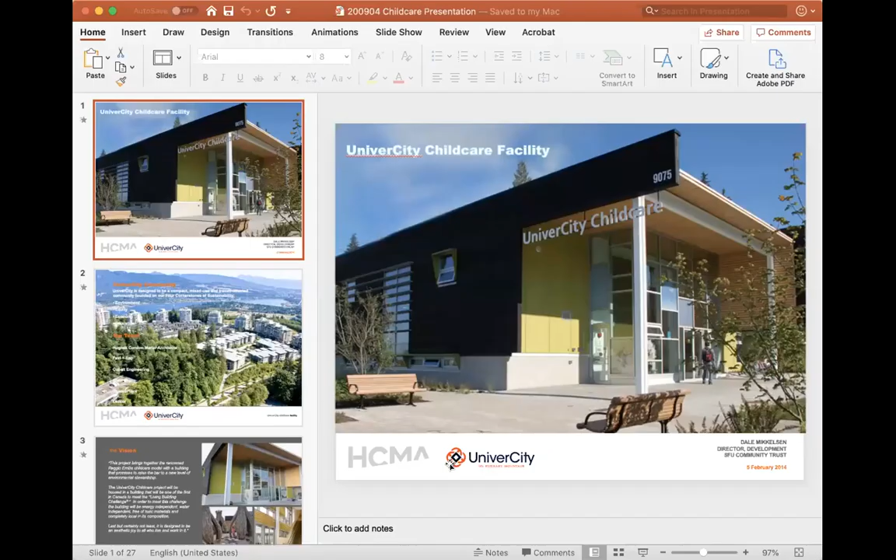All right, perfect. Well, thank you for this, and I'll just do a little time check here so I don't bring any of you over time. So previously I spoke about the community of UniverCity, which is what we call a model sustainable community, a greenfield development adjacent to Simon Fraser University in Burnaby, British Columbia.

Burnaby is a near suburb to Vancouver, BC proper. It's a university of about 27,000 full-time equivalent students, and the community itself, being developed on lands considered residual to the university's core academic needs, will ultimately be between 8,000 and 10,000 people upon full development. At this point, we've got about 6,500 residents living in the community, and it's a comprehensive community.

So when we say model sustainable community, we're not talking just about environmentally friendly buildings or environmental performance, but we're also talking about equitable communities. So we built and continue to build affordable housing for purchase and for rental. We have regular market developments done by market developers where we lease them land on 99-year prepaid leases, and they market and sell strata condo, strata townhouse homes to regular folks. We also talk about the economy. So one of our objectives, of course, is to make money.

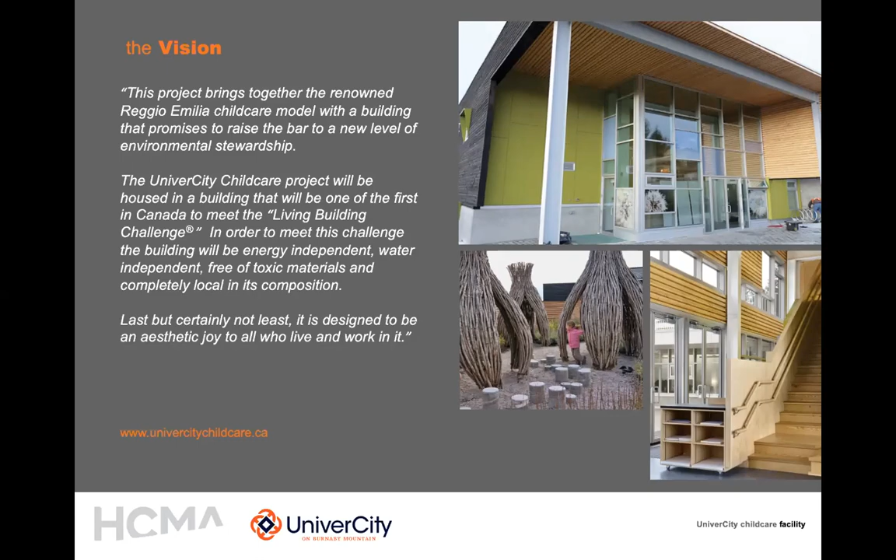And that has been a big success so far in terms of the facility—staff loving it, long-term retention of staff, and families supporting it.

Gold is still a high quality building, certainly, and a bar above a building code building. Then when you get into platinum, you're getting into what we would call your truly high performance buildings. And I would circle into that platinum category also Passive House, although Passive House disregards the efficacy and sustainability of the materials you're using.

At this point in time, Passive House really is an energy model, but as an energy model it's in that platinum plus level. Then there's living building, which the childcare is being designed to meet—net zero water, energy, no toxic materials. And the future beyond living building would be restorative design. Where LEED buildings seek to do better, living buildings seek to have zero impact, and restorative design buildings, in some way, shape, or form, produce more than they need—more energy than they need, treat more water than they need, for example.

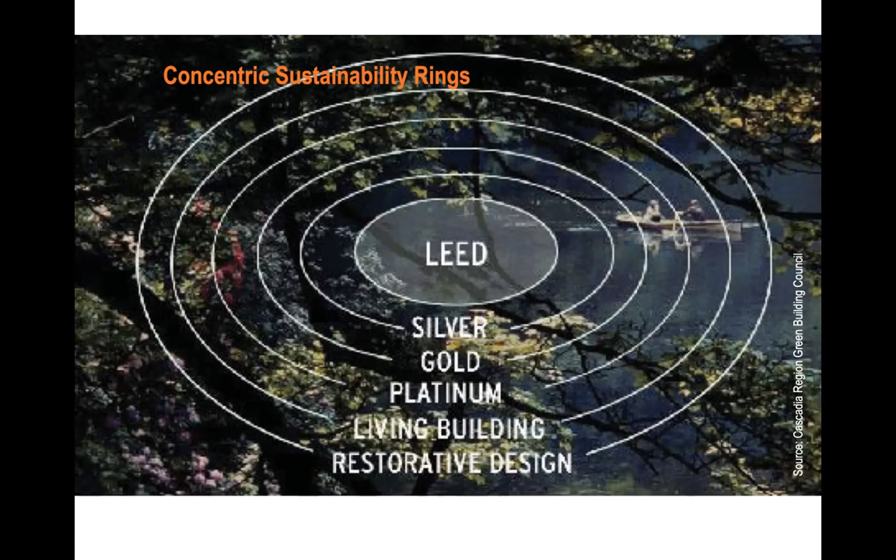Most of you probably know this, but the key to success in any sustainable building is an integrated design process. That process was done with team members throughout the educational community, academic, and development world that was going to be involved with this project.

This happened through a series of workshops. The first workshop really involved those people that would be running the childcare and what they need in a childcare facility. The second workshop then brought in the planning department, as well as the Fraser Health Authority and other consultants, noting that we would be really pushing the barriers in terms of building code, using a lot of performance code rather than prescriptive code.

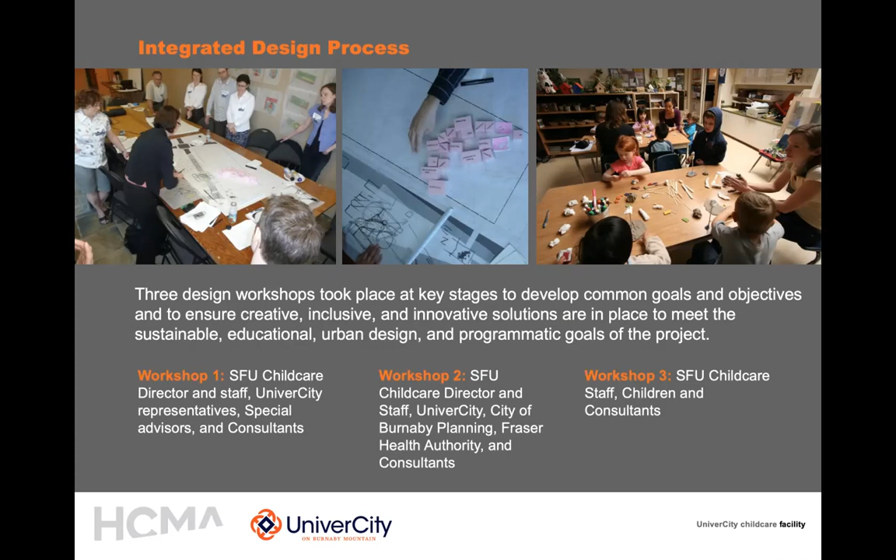And then finally, and most interestingly, was really bringing in the children that are in the existing childcare facilities at SFU to see what they really wanted to see in a childcare facility and what things were valuable to 3 to 5 year olds.

A real diverse mix. So we centered the university childcare one block off the high street, right next door to our fairly new University Highlands Elementary School, which is a public school.

This was in the early days, with a few pieces still not installed, and a lot of natural play equipment.

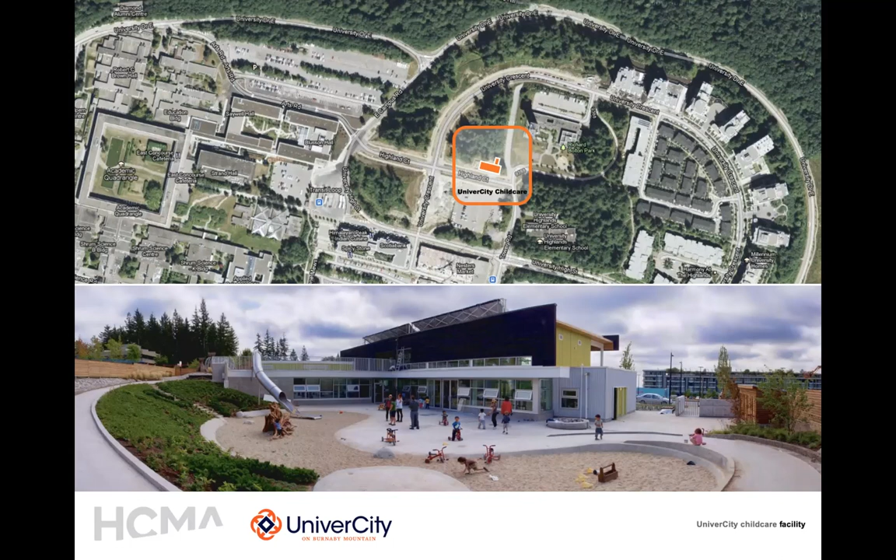This is what happens when you talk to the people who will be working, running and operating that building: having indoor washrooms only is a pain when 70% of the time children are playing outside. So very simple things add demands to the building. More washrooms equals more black water, which equals longer piping runs, et cetera, as well as provision of treated stormwater for art sinks, hand washing, and so on.

Site area is about 2,000 square meters, floor area about 530 square meters, or almost 6,000 square feet, and a very comprehensive outdoor play area of about 4,400 square feet.

Our construction costs for the project, including landscape, basically a full turnkey operation, fully furnished, operating, ready to go, was $3.2 million. That budget is a really interesting part of this story, in that we looked at 4 equivalent childcare facilities being developed in the region at the same time, of varying standards, anywhere from LEED certified to LEED platinum. We looked at construction costs for other similar wood frame structures, averaged that price, and said okay, this would be the price for a conventional building.

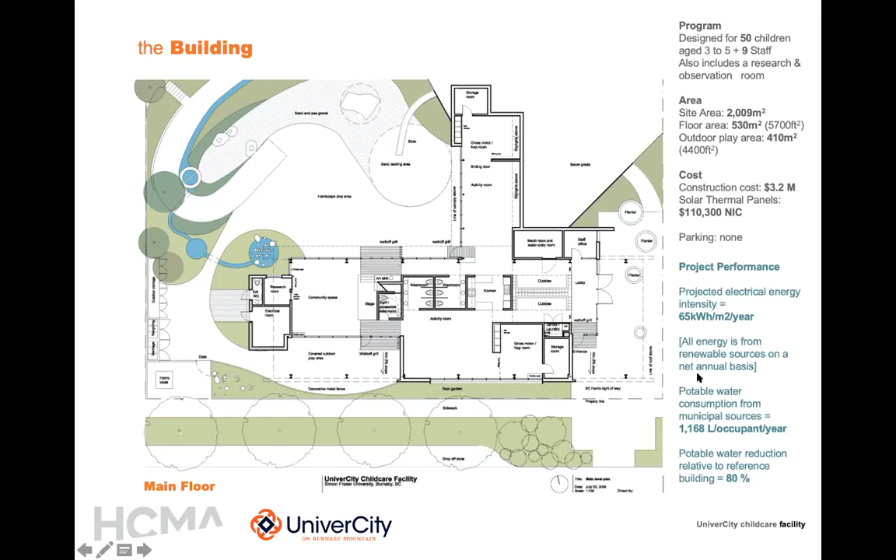We looked at our potable water consumption from municipal sources, and it's a surprising number, almost 1,200 liters per occupant per year. Compared to a reference building, we were looking to reduce that potable water need by 80%, which of course lowers the demand on the building systems as well.

Basically the categories of the living building challenge, like LEED, are site - are you selecting the site responsibly? This site was a previously disturbed site, used for storage and backfill and waste during the initial construction of the campus. Limits to growth is really working within an already planned community with planned density.

Habitat exchange is interesting in that you're looking to offset your site footprint with preserved habitat elsewhere, and that can involve very large scale jumping - you can go way outside of your region. We could have bought a hunk of land in the Yukon of the same size and dedicated that for permanent habitat exchange. I have some emotional challenges with this, but at the end of the day, up at UniverCity, we had set aside a considerable amount of land, comparable to the entire community, in permanent conservation area and green space through the development of UniverCity, which qualified to meet the habitat exchange.

So our conservation area on the mountain also worked for our habitat exchange. Again, this is that scale jumping for things that you can't do on site. You can maximize opportunities within your local neighborhood if you're already doing sustainable things.

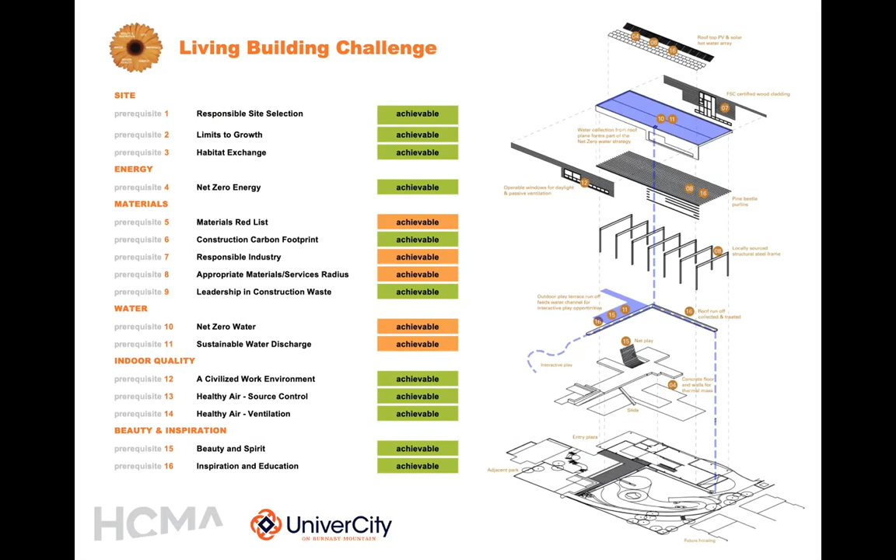Indoor air quality, again, this is really out of the LEED books, fairly manageable in terms of 100% fresh air, good quality source control. And then beauty and inspiration—I mean, it's a childcare facility, it's for kids. Bit of a no-brainer for this one. You're building a space for children. It should be wonderful. So I'll dive a little deeper into some of this here.

So the first one's energy. 100% of the building's energy needs supplied by on-site renewable energy on a net annual basis. And I'll speak a little bit about the district energy utility and my challenges with the living building challenge here.

So we looked at the total energy load in the building. Heating, of course, in North America or in Canada is the primary load, followed by lighting. Surprisingly, the black water treatment takes quite a bit of energy, and then other minor items. But really we're dealing with heating, lighting, and the black water treatment facility, and the black water is mostly all of that pumping energy and treatment energy.

So the living building challenge hates combustion. Our neighborhood energy utility within the SFU campus and within the university neighborhood is a bioenergy facility that is combusting waste material. This is primarily wood and organic waste, largely from construction, that is dirty, uncleanable, untreated, and otherwise would be directed to landfill. So rather than directing these materials to landfill, they're directed to our neighborhood energy utility, which combusts this material at close to 92% efficiency with good quality air scrubbing and condensing systems, creating very little local and larger emissions.

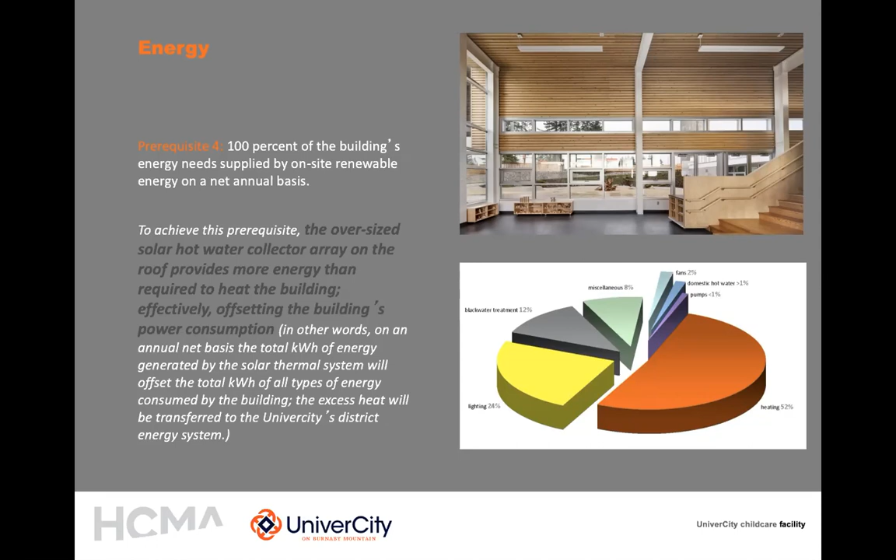So we have yet to achieve the certification of a net zero energy building. We're about 20% shy of that because, in terms of the math of the solar thermal energy and the metered volume we're producing, our neighborhood energy system, at the temperature it operates at, cannot take it all in at the peak periods it's being produced. So we're basically blowing it off - a bit unfortunate that way.

Had the Living Building program allowed combustion, we really probably would not have even needed these solar thermal cells, except to maybe offset the missing 8 to 10% efficiency that the system itself is not providing.

So anyways, here you get a look at how that solar energy system works that I just described. We have the evacuated tube solar collectors on the roof, which basically run through a heat exchanger, working with a mechanical room. Some of that is captured for the in-floor heating, but the majority of it is brought into the Corix bioenergy system.

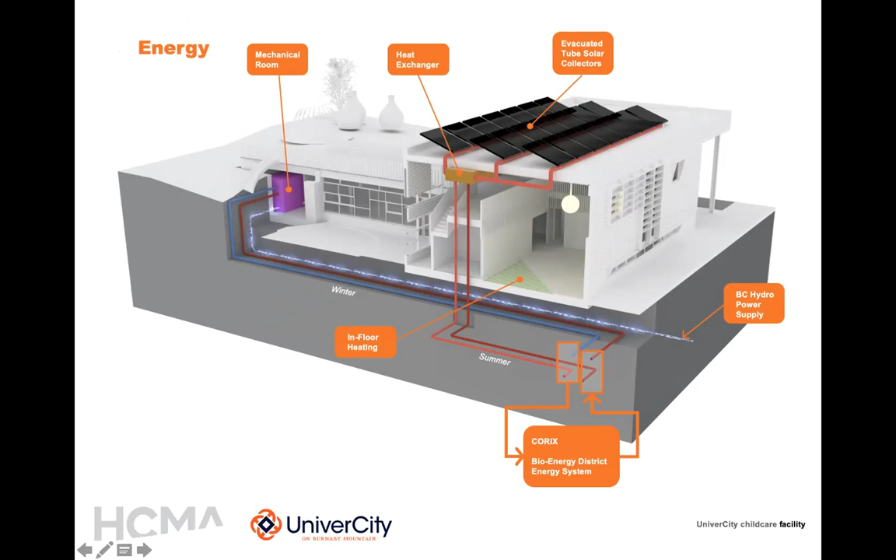And then again, we overproduce to offset our BC Hydro power supply, which electrical energy is really only used in this case for lighting and plug load, which is minor in this building.

So the next item is water. According to the Living Building Challenge, 100% of the occupants' water must come from captured precipitation or closed loop water systems. So as we all know, this is really, really challenging.

The Fraser Health Authority and the City of Burnaby regulations require the treatment of drinking water with chlorine. Therefore, the project's drinking water is supplied through a municipal source. That's an acceptable deviation from the Living Building Challenge, with a letter from the Fraser Health Authority and the City of Burnaby saying they would not accept on-site treated water that is only treated through UV filtration.

So we do use municipal water for all drinking taps. Rainwater is collected and treated before use for flushing toilets. It's actually also now used for janitorial sinks, and it's used for all of the laundry systems, and it's used for the commercial dishwasher because that essentially boils water prior to cleaning the dishes. And the project has no site irrigation.

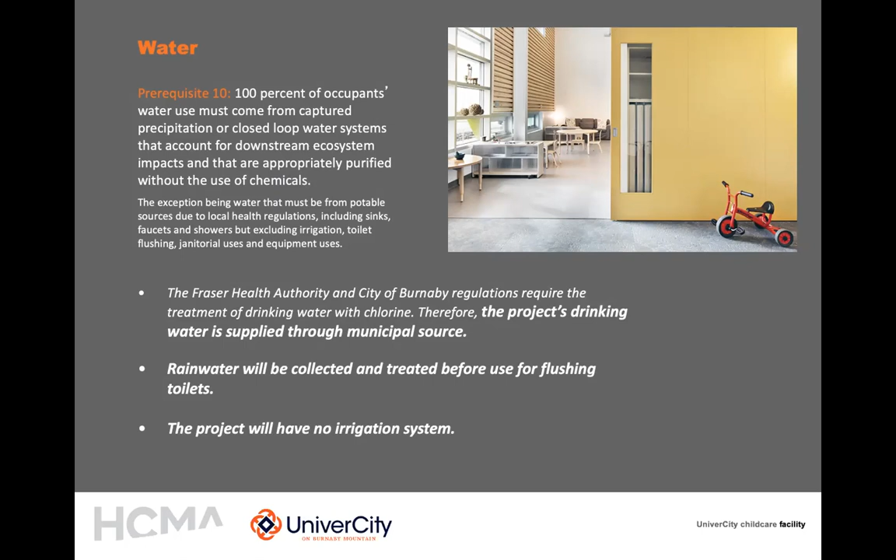So this is where we go back to scale jumping - this is the stormwater question. Certainly in British Columbia and the Lower Mainland, we get a lot of stormwater. So stormwater and building water discharge has to be managed on site and integrated into the building.

So we produce or capture more stormwater on this site than we would ever be able to use on an annual basis, particularly during the wet seasons. In addition, the size of the cistern or storage facility would have to be massively large.

So fortunately, at UniverCity, right from the outset, we'd worked with the City of Burnaby to have neighborhood stormwater management. As I spoke to in my last presentation, 100% of the community stormwater is not put into a conventional storm system, but is rather managed through swales, infiltration galleries, and ultimately ponds, and then dispersed to the Stoney Creek watershed. So we were able to tie all of our residual and excess water out of the cistern into the community system, knowing that it was being treated 100% naturally. It really was a low cost solution for us that was already managed at the neighborhood scale.

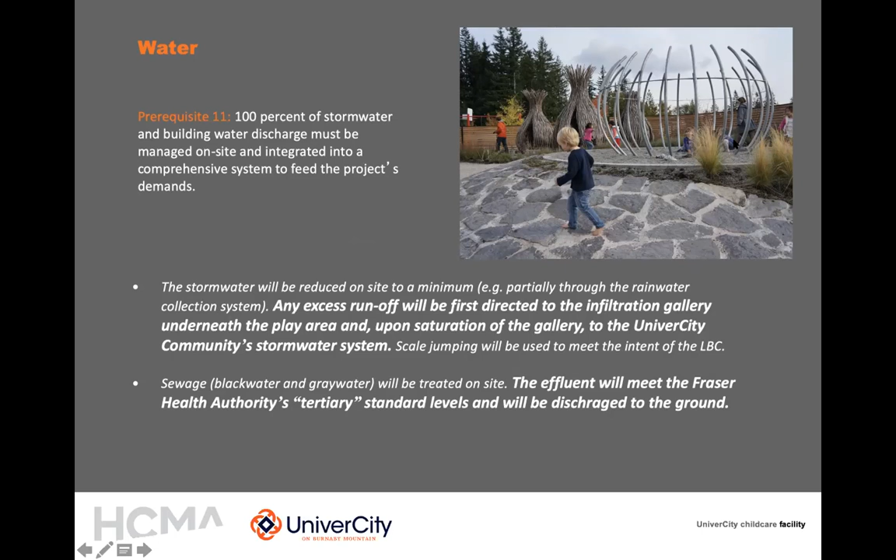The sewage, black water, and gray water was treated on site, and I'll speak to that system in a second. So really here's the water cycle scheme.

The municipal water, as was required by code, was used for really the sink and the drinking fountains. And then, as I noted, we've since been able to migrate the dishwasher, because it's a commercial dishwasher, and the laundry into the rainwater system. So the rainwater in the storage tank, because we had residual water, is now being used for toilet flushing, all the janitorial needs, the laundry, and the dishwasher.

Irrigation is a bit of a misnomer. We don't really use it for irrigation. What we do is reject some of the residual into the underlying soil, which acts as a sort of passive irrigation. We have no water features in the building.

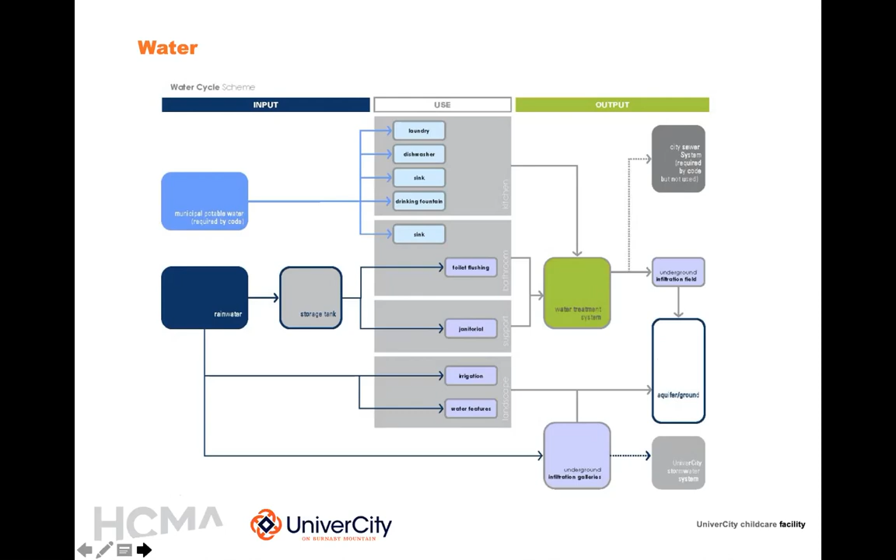Anything used in the building goes through our water treatment system, which is backed up to the city sewer as required by code. We have yet to have to utilize or back up to the city system, and it goes into either our UniverCity communal rainwater stormwater facility or into our black water treatment system.

So here's a blown up drawing of really how that works, and it's just that flow diagram put into 3D for you, so fairly straightforward.

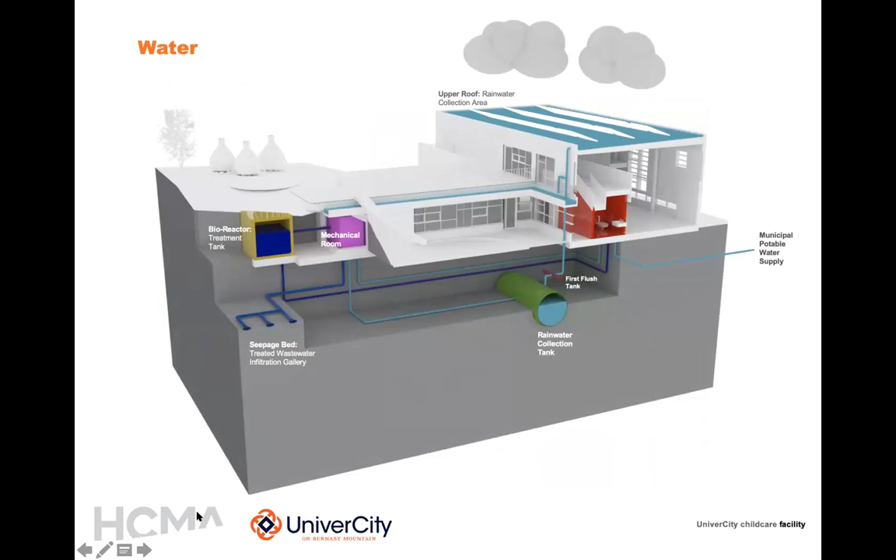It goes through an anaerobic digestion process, then it's further filtered through a carbonized area, and then finally it goes into an aerobic zone that allows the growth of bacteria that further treats the water.

All of the liquid portion, which is about 80 to 85% of the effluent, is rejected to ground within the childcare site below 1.5 meters in depth.

We put in a couple of wells just to make sure there wasn't any fecal coliform or any other buildup of contaminants. And 5 years in, we're showing nothing that would be contaminated. So that water coming out is essentially equivalent to rainwater in terms of its quality, and that's how it's considered by Fraser Health.

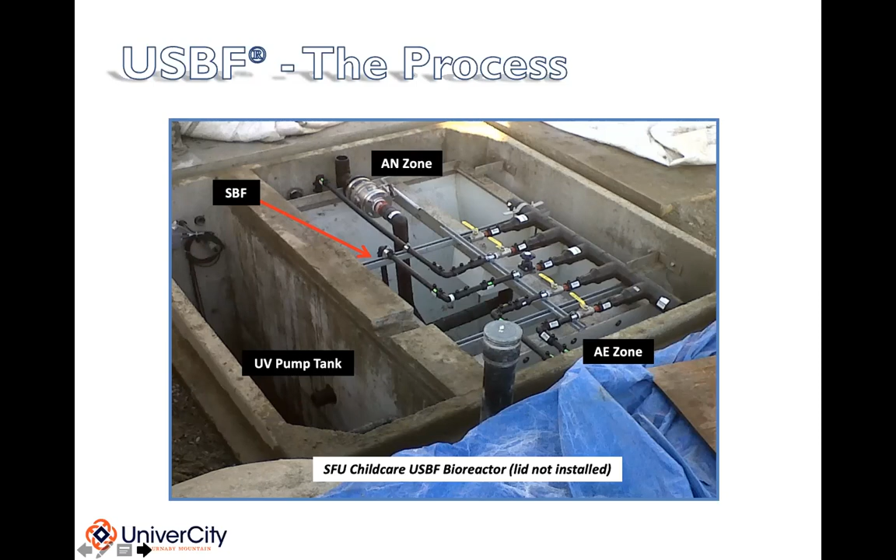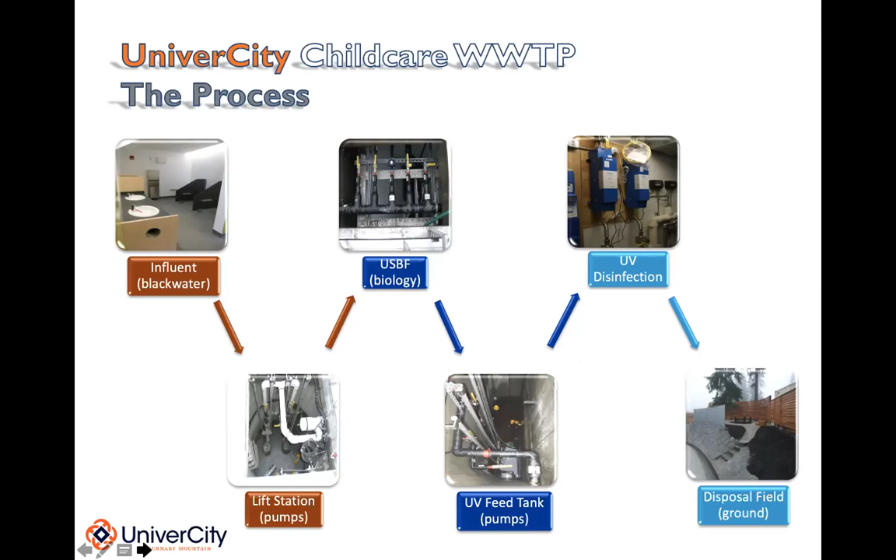So there you go, the influent, the black water comes in, goes through the pumps, the lift stations, through the biology system, back through the UV tank for UV disinfection of the liquid, and then out to the disposal field. So graphically fairly simple. The technology has proven to be fairly robust for us, knock on wood, 4+ years in. It's actually been, to me, one of the biggest successes because of how easy it is to operate.

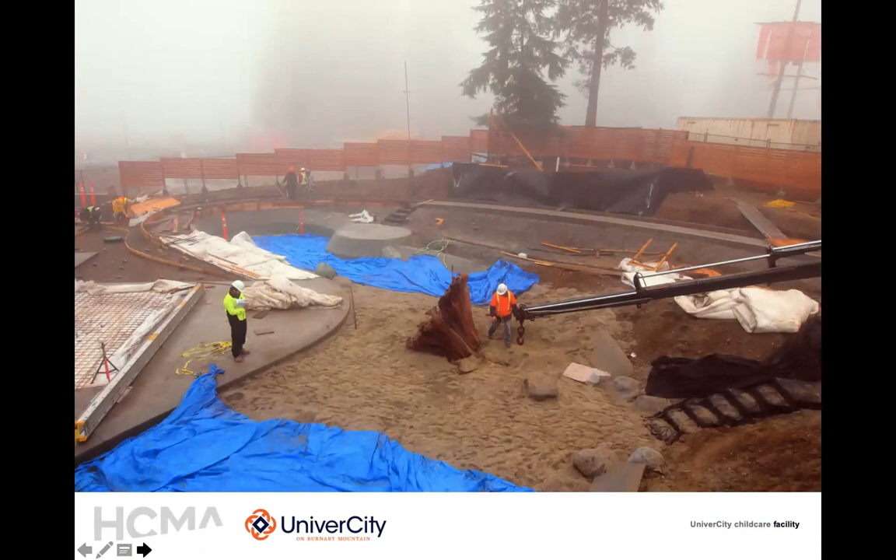Just a photo of construction of basically a landscaped, highly infiltrative play area for the children using natural features like cedar stumps as play features. But really what we're showing here is the area below that sand bed is our entire site infiltration gallery. So doubling up on the uses, you need large layers of sand and soft surfacing for children's play. You also need that for absorption and infiltration. So things can work together very well.

This is a look at the play features in the facility. This was an interesting and fun part of the project. The Living Building Challenge doesn't necessarily require you to meet their requirements in terms of the external space of the building. We did choose to build all of our play structures meeting the Living Building Challenge.

Using native materials found within the community or within the appropriate materials radius for the Living Building Challenge, we have a variety of interactive features like stepping stones, using recycled steel rods to create what we call the ropes nest, which allows children to use rope salvaged from the local sailing industry to create all kinds of structures and features. It allows the play facilities to continue to change and evolve over time rather than a static piece of plastic play equipment.

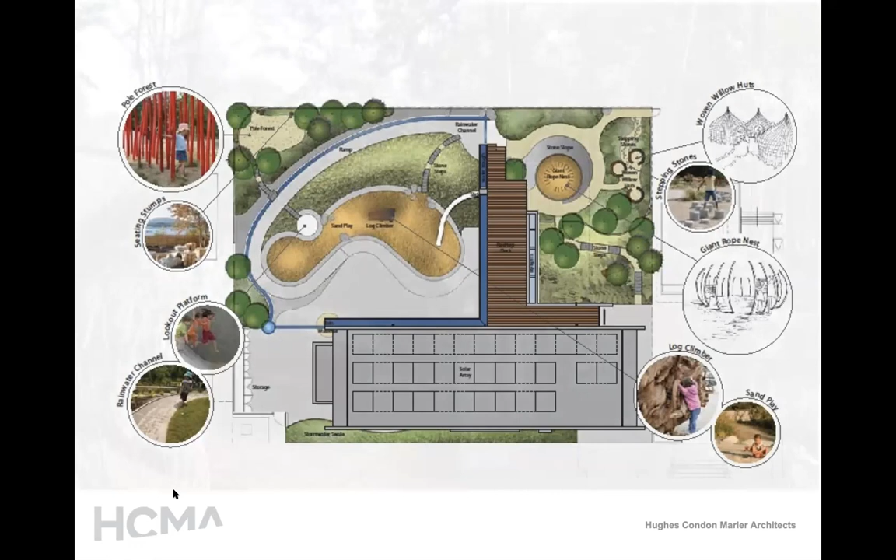We worked with a local artist to salvage willow and rebar and create these woven willow huts that continue to change with seasonality and time as well. So it's been a really fun and interesting part of the facility. These are the woven huts. Alistair's sample, done on his own compound on Hornby Island, is to the right, and to the left, using those kinds of ideas to create the structures.

This was perhaps one of the biggest things learned from Ledcor, the contractor. They were very familiar with LEED, not at all familiar with the Living Building Challenge. As with LEED, they realized early on that to be successful they would need a system that was teachable and repeatable, so it couldn't be new every time a new trade or contractor came on board. They needed replicable, repeatable systems, so they developed a spreadsheet system and a classroom system reviewed semi-weekly to ensure everybody kept being reminded and put into this simplified system of tracking what they were doing and how.

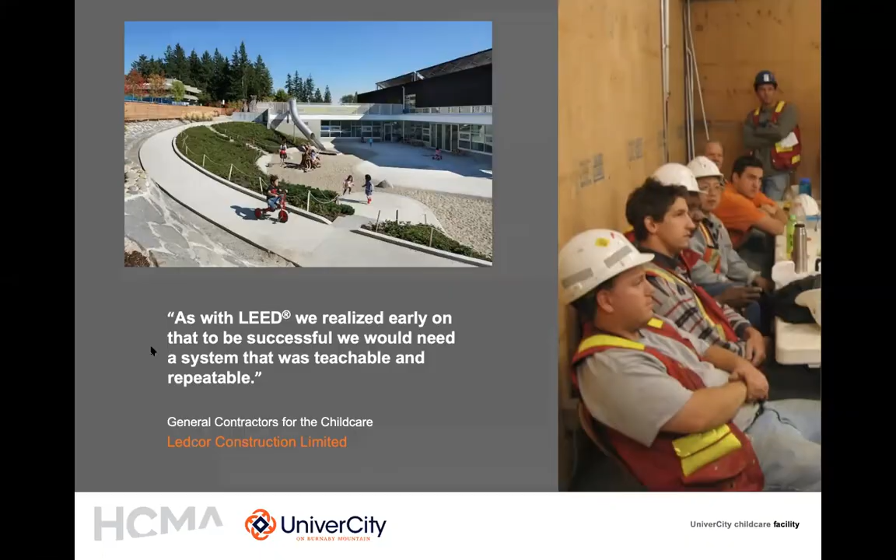So this is the question I was talking about. Materials was a real challenge for our contractors and suppliers. Given where we're located, the Living Building Challenge requires about 80% of your materials to come from that inner ring. When you're on the west coast of Canada and your next nearest urban center is Seattle, you're really limited in manufacturing options.

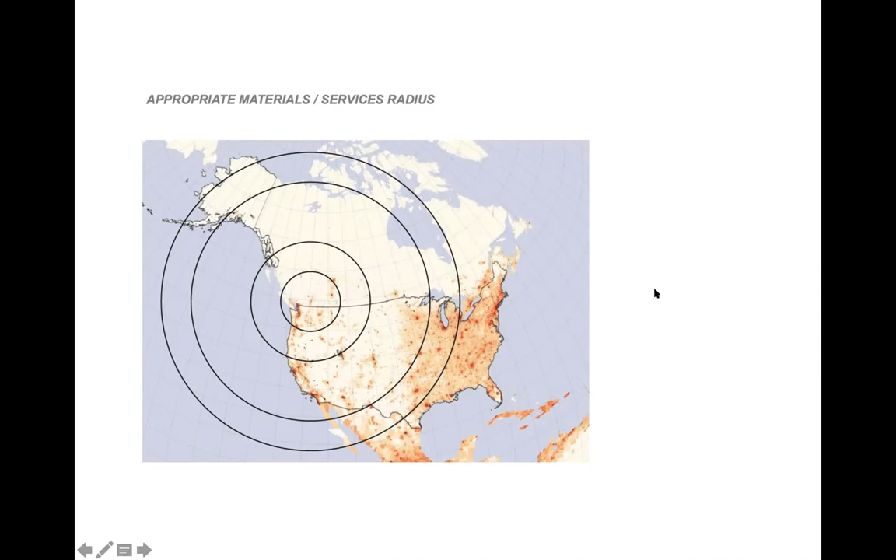This heat map is designed around the materials manufacturing sectors in North America, showing building materials and where they're manufactured. You notice a huge amount of yellow in our radius, so establishing those material flows was really challenging. If you're in Toronto, New York City, or even Miami, Florida, despite water, you have a lot more opportunity for materials availability. So our list got really small, really fast.

So what our team did is develop a very small palette of materials and said, let's simplify this building, let's minimize the number of materials. Our building is made out of really six core building materials: steel, Hardie board, dimensional lumber, drywall, and flooring material. It's a very simple building to review against this criteria. Then we worked on the architecture to make it more exciting through color rather than articulation and change of materials and claddings, et cetera.

So what we learned is that the materials red list was very, very difficult. At the end of the day we did achieve it, and that service radius didn't help at all. In the end we managed to be awarded the Living Building Challenge certification for all of these items, except for, as I noted, net zero energy. So it's been a fairly successful project, however there's been a lot of lessons learned.

At the end of the day, it's the right thing to do. Would I do another living building? Probably not. But we learned a lot through this process, and a lot of this applies to, for example, our Parcel 21 project, which we're working on next. We also learned that the LBC program is a work in progress. Even five years later I consider every LBC project still a pilot project. You have to do this because you really want to, and because you feel there's value in advancing the thought around green building or demonstrating to other more traditional developers what is possible within a fixed budget.

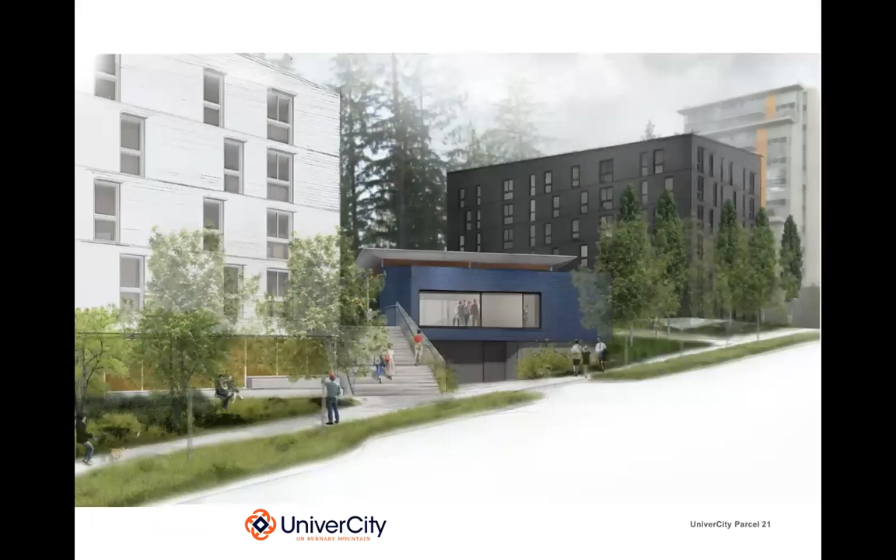And so that brings me to wrap up the last 15 minutes on our next project, which is what we call Parcel 21. So this is a 2-building, low-rise, wood frame, rental apartment building. You can see the renderings here.

We're now, the white building you see on the left, is now almost closed up with interior starting. And the east building, the black building you see behind, is 2 grade and is now starting its framing process. We're expecting occupancy in August of next year, so that the September intake of students will be able to occupy this building.

100% during that year. And then you'll note what we call the pavilion in the center, this small floor plate steel structure separate from the other building envelopes, will become a public facility for the community and for the campus. One of these things about large high density communities is they're always seeking community space.

Universities are seeking community space, graduate students are seeking gathering space where any kind of event can be programmed. So it's a simple open pavilion that will be a gathering space that brings community and the university together, and also protrudes upon the building setback line to really announce its forward-facing publicness. So a very interesting project.

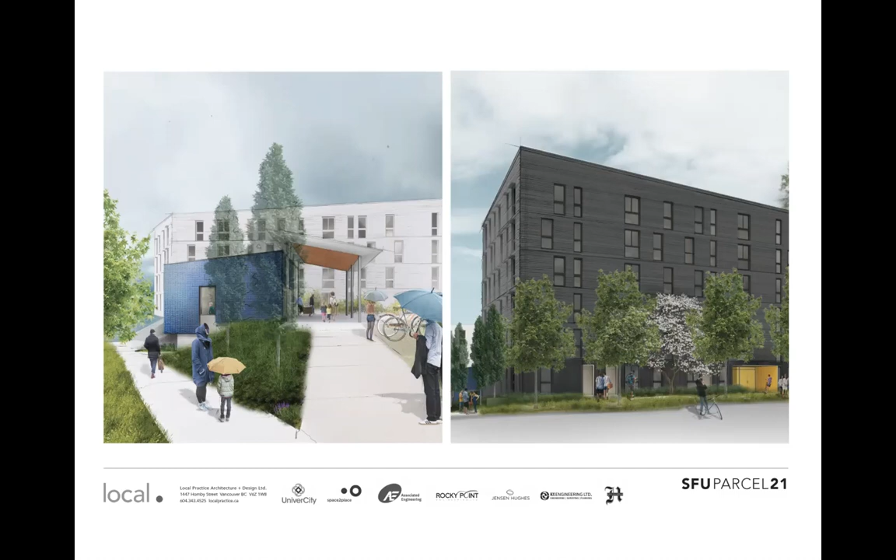The thing about Passive House buildings, of course, is you want to minimize articulation, you want to minimize window wall, and you want to increase your thermal envelope, which is really your insulation and your air tightness of the building.

We basically came up with this floor plate as the most efficient floor plate and model for Passive House construction. There's also a simplicity and an elegance in building these, so rather than spending a lot of money on articulations and architectural treatments, you can spend your money in the envelope and insulation of the building, and really focus on the human spaces rather than the building itself. So that was the objective here.

What we quickly realized through Passive House modeling is in multi-unit residential buildings, Passive House goes to the center of the earth, which means your parkade facility, your underground parking facility, also needs to meet Passive House certification. This has considerable implications on how much air tightness and insulation you need around the elevator core, and how much all of your below-grade footings are also insulated and mounted onto basically styrofoam plates, which is a code challenge and a code issue. So we looked at what it would take to make the below-grade space meet Passive House certification.

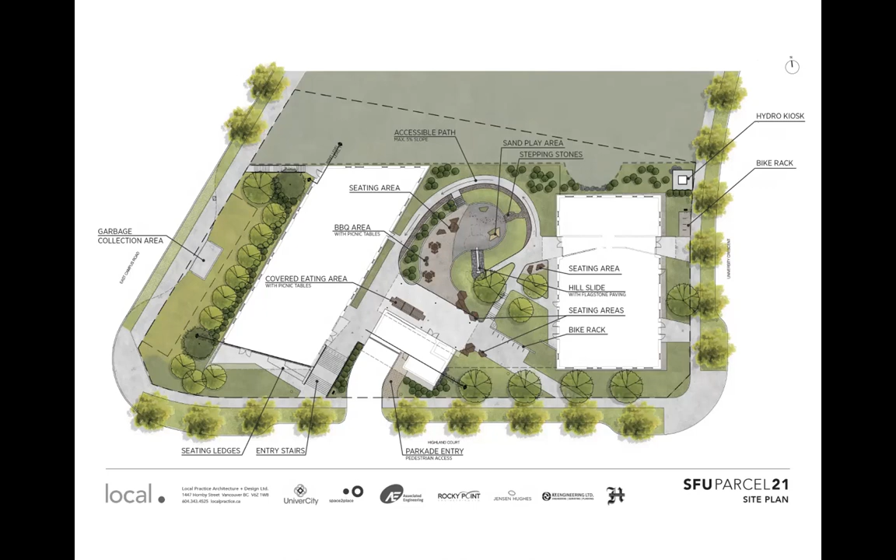And when you're building smaller units, these units will all feel like every room has substantial lighting, because the windows start at about 2.5 feet high and go to the ceiling. So while they're not wide windows, they're tall windows. They allow a lot of light in and they're carefully placed, while minimizing your solar gain, which increases comfort and increases the opportunity that people will likely have their blinds open, not closed, fighting that heat. So it's the quality of the window space we're looking at, and fully operable and opening windows.

The focus here has been to create highly efficient, smaller units. 55% of the units are 2-bedroom units in very small floor plates.

The idea is that on every floor near the elevator core, we have these study or community rooms. So not only do we have the pavilion, but knowing there's going to be a lot of children in this building, we have these study rooms. So after 6 or 7 o'clock at night, when one parent has to put the children to bed, and the other has to be studying for an exam or a dissertation the next day, they can migrate to these study rooms and find a quiet space on their floor that they can wear their slippers to — it essentially becomes their den, their living room.